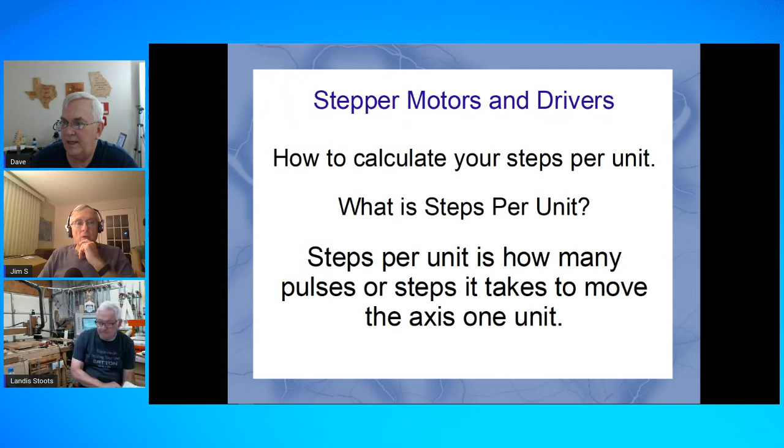Now you might be saying, well, what the heck is a unit? If I can get this thing to change here - there we go. A unit, if you're setting your machine up for inches, one unit's going to be 1 inch. If you're setting it up for metric, it's going to be 1 millimeter. So that's what it means by steps per unit - if inches, how many steps it takes to move 1 inch; if metric, how many steps it takes to move 1 millimeter.

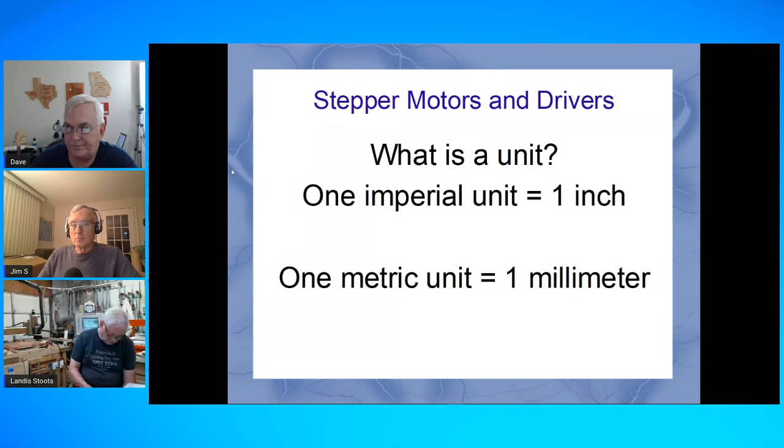Now when you're talking about these stepper motors, and this is a picture I took of this one - pretty much all stepper motors, or most of them, are going to have 200 full steps per revolution. So to go one complete revolution, it'll have 200 what they call full steps. And somewhere on this thing it will probably have a label that says 1.8 degree per step. For example, I highlighted over here on this one - this one said 1.8 DEG/step.

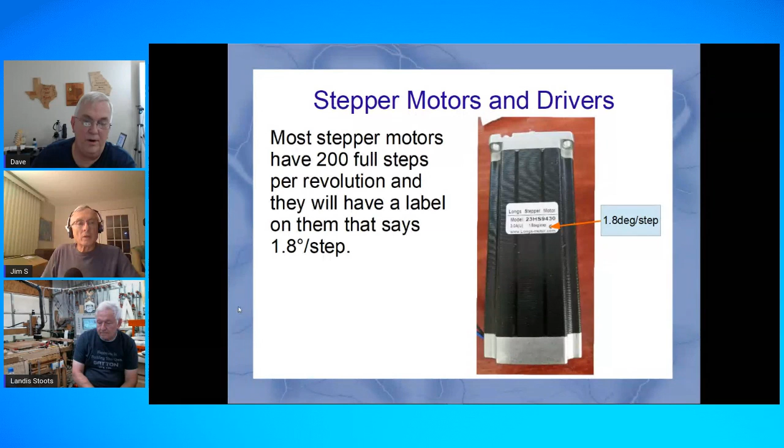So where that 200 number comes from is if you take 360 degrees in a full revolution and divide that by 1.8 degrees, that's 200 steps. So that's where that number comes from.

Now when we're talking about a Gatton CNC or a GarageWorks CNC, assuming you've used the lead screws that I highly recommend, they are an Acme Precision lead screw. I always have links to McMaster Carr on my website so people can make sure they get the right thing. But they will say that they're half by 10, meaning ½ inch diameter, by 10 TPI. In this case, TPI means threads per inch, how many threads are on 1 inch of that thing.

And then it will also say 5 start, and it may in some places say 2 TPI. Well in this case, that TPI doesn't mean threads per inch, it means turns per inch.

So a 5-start lead screw - let me just do this real quick. This is the 5-start lead screw. I tried to take a Sharpie and put a little dot where the 5 threads are, so when you cut this and look at the end of it, you'll see 5 individual threads. So that's what a 5-start is. Also you'll notice the threads are angled at a much steeper angle than say if you got some normal thread, it has a much steeper angle to it.

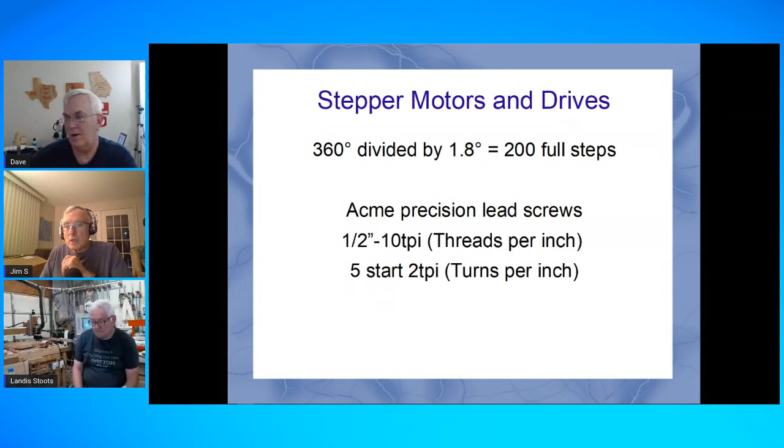All right, let's see what else we got here. So this is what the driver looks like, and you'll notice that it has a pulse rev table right here. It starts out at 400, 800, 1600, 3200, 6400, 12,800, and 25,600. And of course, if you want to use the 1,000, 2,000 and all that, some drivers will use that.

So here, this is how you figure out how to set your dip switches correctly. You have to kind of do a little formula with the stuff, a little calculating, to know where you're at and what you need to set this at. If you want to set it at 6400, which is what I have on the website listed, it says switch 5 needs to be off, switch 6 is on, 7 is off, and 8 is on. So it's off, on, off, on for those dip switches, 5 through 8.

So that's what you would want to set it for. And here I've kind of laid this out where I've done the calculations for each one so people can see how you arrive at this. Notice in red is the one I have, because that's the 6400 steps per unit you'll be setting the dip switches for. That is if you want to set it for 16 steps, meaning between each full step there's now a total of 16 steps from one step to the next, versus trying to run it full step, which you never want to do because it's going to run really rough. But you could do half step, quarter step, 1/8 step, all the way up. You can even go higher than that, and you'd have a much finer resolution down here.

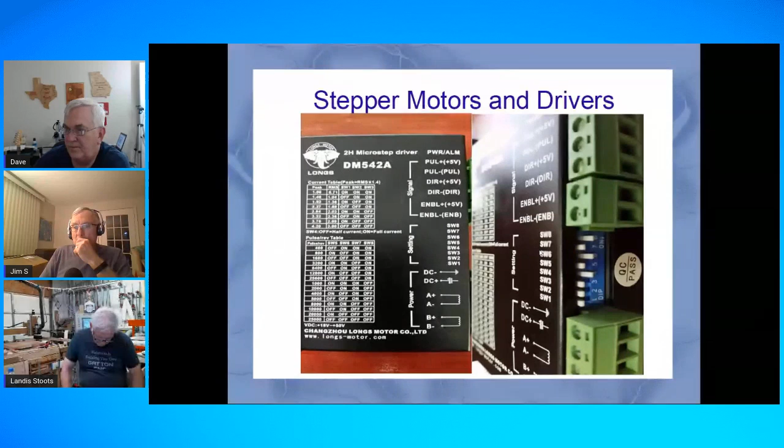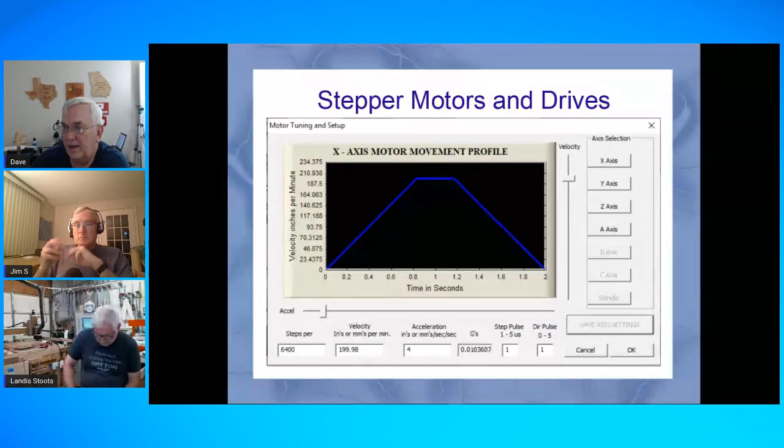And that is the magic number that you put right here in your steps per unit. In your Mach 3, same thing in UC CNC, and I'm assuming the same thing in Linux. I don't have Linux software, so I'm not super familiar, but I'm sure you have to tell it that somewhere. So that's how you arrive at, here we go, at that 6400.

Yes, it's 5 star. I see Matt said 5 star or 5 star. Yeah, it's 5, it means 5 start with the T on the end.

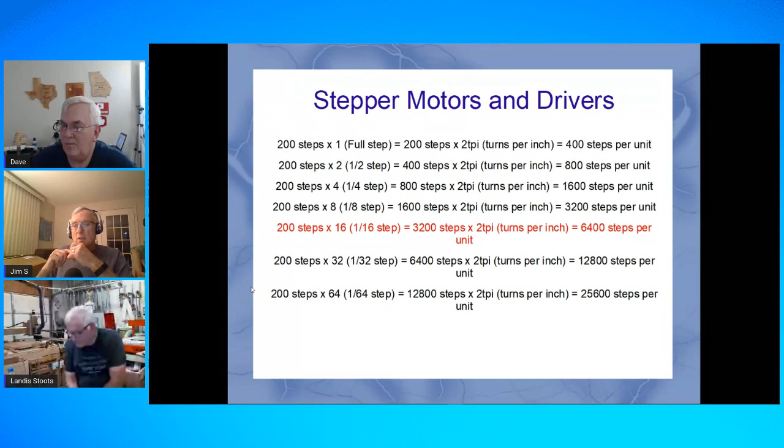Okay, so that is where all those numbers come from. And like I said, I hadn't really explained that before because I always recommended the plug and play kit. And usually the people that wanted to build their own electronics knew all that stuff anyway, they knew how to figure that. So I just wanted to do a little refresher, I guess, or maybe not even a refresher because I don't think we've really talked about that much. But that's how you do it.

And I guess I should go back and look at this real quick. The way this works, again, you take the 200 steps from the stepper motor. If it's a 1.8 degree for 16, you take a 16 step, you take it times 16, it gives you 3200 steps, and then you multiply it by 2 because the lead screws have 2 turns per inch, and that's how you get to 6400.

And as you can see, when you start out here, they just all kind of double as you go. You just keep getting finer and finer resolution. But 6400, or even 3200 if you want to set it for that, would work fine with the Gatton or the GarageWorks, either one. I just always use 6400 because that's what those plug and play kits were. So to keep it simple, that's the way I've run mine. And even when I use the kind with the drivers like this, I just set them for 6400 and it's worked out well.

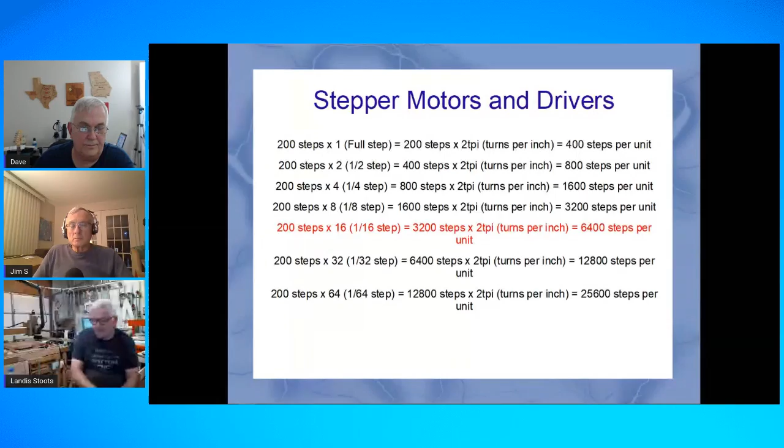So let me take a look back over here in the chat, see if we've got any questions.

Scott Wilson says, the dogs are on, you're killing me. I know, I've got them on my TV in the living room. I just got the sound muted.

Not that I could hear it back here anyway, but all right, Kevin says his is set to 4,000 steps per unit, and he's running a Gecko. Yeah, the Gecko uses all those other numbers, the 1,000, 2,000, 3,000, 4,000, and all that.

Let's see. Wayne Hurl's out there, I'm trying to say, I don't see any questions. So either they don't care or they understand.

That stepper looks like it's a foot long. Yeah, it's not quite a foot long, but it's pretty big. Larry Dugger says he suffered from the great Molex connector burnout this week. Well, all I can say, Larry, is that it's going to get you sooner or later. So if you're using Molex connectors and you think they're working okay, it'll get you sooner or later. I can guarantee you.

Hey Dave, you might want to mention too, when you change those settings in Mach 3, you have to click on save. Yeah, that's another good point.

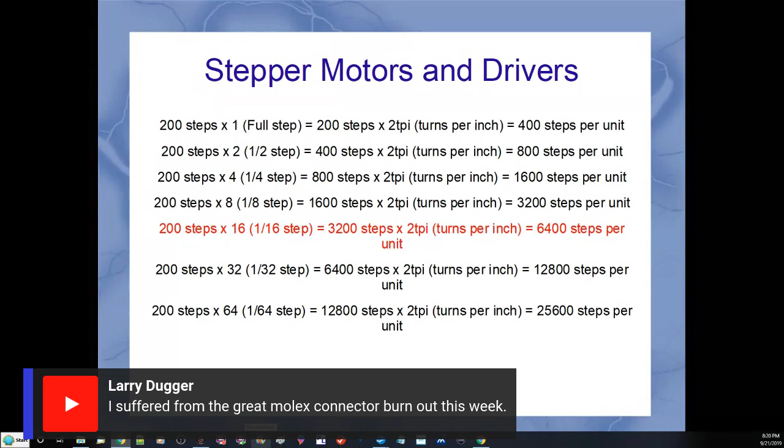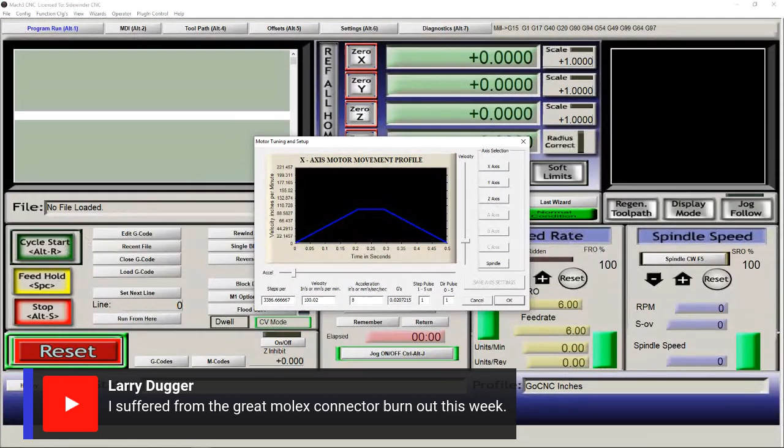In fact, I've got, let me turn that off and come back to, if I can get this. Yeah, I'll just show it here. Yeah, when you get this setting, well this one's going to look all screwy because I've got this one connected to that little machine behind me here. So I had that set up for the show in case anybody needs to see any kind of, well if it's only 20 after 8, I'll probably do a little demonstration for something else of a question I saw on Facebook. But yeah, this for the Gatton and the GarageWorks, this would be 6,400 here.

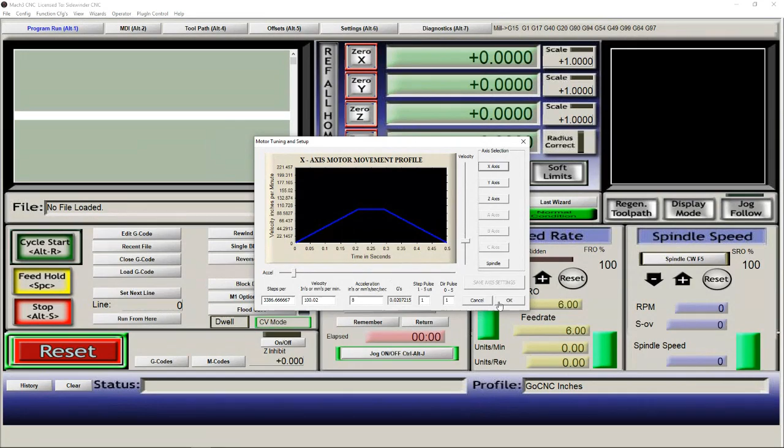And then you need to make sure whatever you put that in, that you have to hit this button here, which is grayed out right now, but it says Save Axis Settings. You have to hit that before you move on to the Y axis. Because if you don't, and you put a number in here and then you just click onto the next one, it automatically reverts back to the default, which I believe in Mach 3 is like 2,000 or something like that. So you won't actually be saving those. And of course, the other good thing to do is to come here and save these settings for your configuration so that you save everything correctly in your XML file.

So, all right, let's see. They make 0.9 degree steppers too. Yeah, well, that's half of 1.8, so sure.

Dave Mitchell from Seattle. Let's see what else we got here. Steve Atkins says, "Go Dogs."

Okay, Greg says, "How does the CNC interface with the PC?" That's a good question. I'll try and explain it here. Okay, it says CNC here. For most of these hobbyist machines, it used to be a serial interface, or a lot of the older ones use the old-fashioned parallel ports, and some people still run that.

But now I have a little device. I'll see if I can hold it up here without unplugging it. I am actually running a UC100. It's this little device which connects to a parallel port, so that's running to the controller on the back of that little machine. But this is nothing more than a USB cable running to the computer, which interfaces with this software, which is the Mach 3 software.

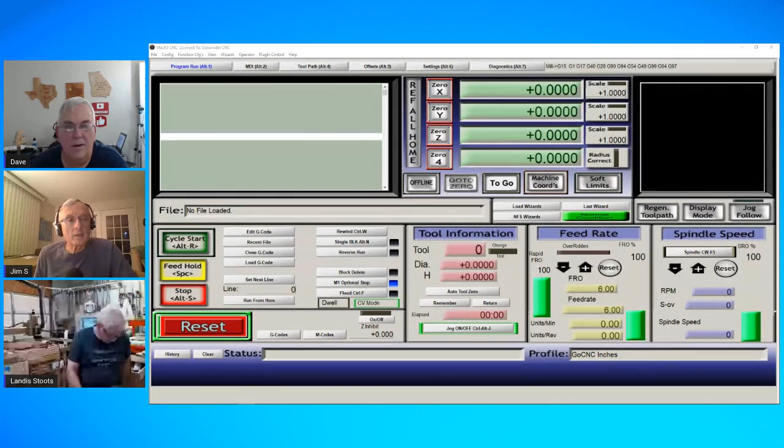All right, let's see. I'm not sure what Dave's trying to say here. The URL should show you a picture of the screen. Dave, do you have to put in a load resistor for the motor controller? No. Like I said, I'm not an electronic guy, but I know enough how to hook up the stuff I use. I built my own electronics, and I did not use a load resistor. It's not needed.

Okay, let's see. He says, look about 3 comments higher. Let's see if I can find where that question was. Well, it may be more than that. Yeah, I don't know what he was trying to say there. Okay. Alrighty.

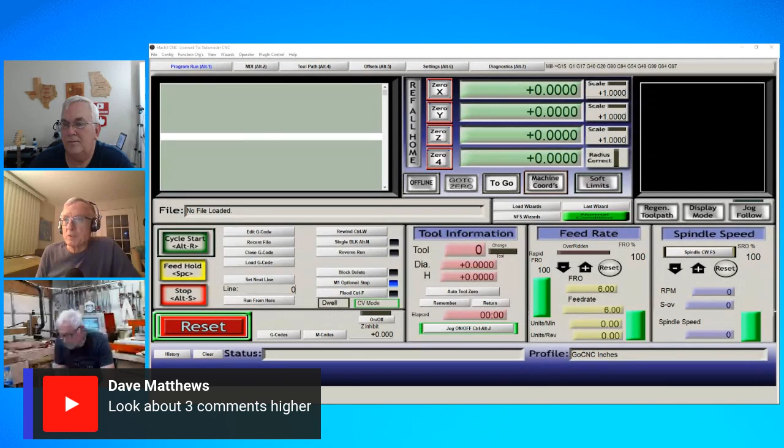That question from Thomas Grim: if it fits with the topic, I'd like to see a demo of the jogging functions, and how do you control the jog step size, and how does it interact with an LHB04 controller?

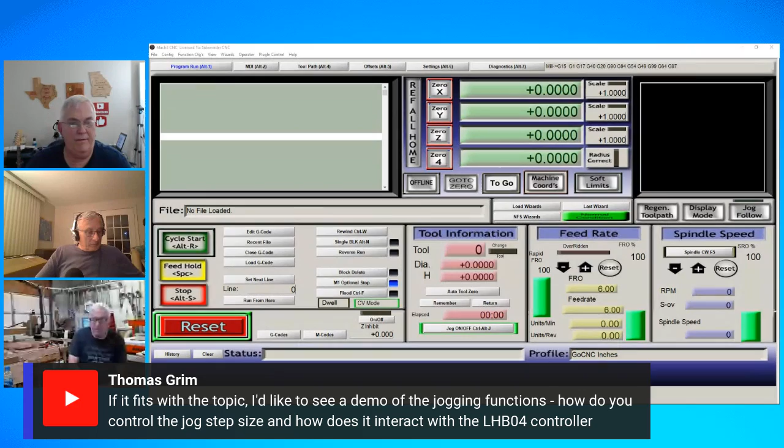Okay. Well, let me turn the screen share off here. Oh, great. Now it's not going to work. All right. Let me see if I can reset that camera. Is it there now? Nope, it's still not popping up. Well, I may try to do that, Thomas Grim, if I can get this to. It's up, Dave. Oh, it was up for a second. There you are. Okay, I got this.

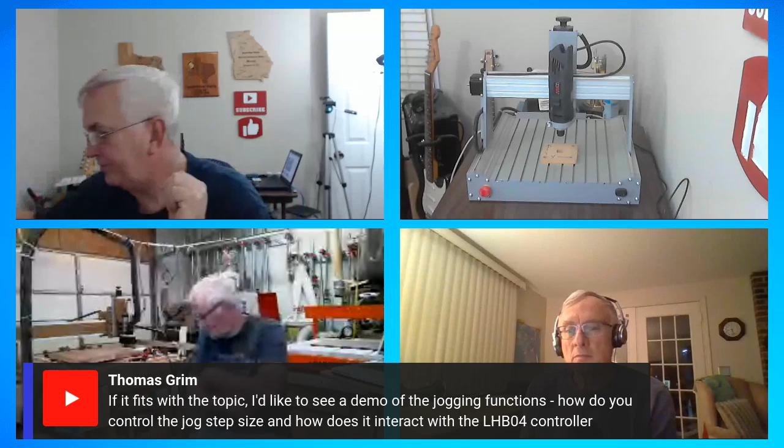Okay, so he wants to see a demo of jogging functions, how I control the jog step size, and how it interacts with an LHB04. The LHB04 controller, that's the pendant, I believe. Well, I don't have a pendant connected to this one, simply because in order to control all this by the same computer I'm using to do the live stream, I'm totally out of USB ports, because I've got all kinds of stuff hooked up to do this live stream.

And when I screen share to do the software, it's going to make that picture little, so you'll just have to bear with it. I'm hoping they will add some more options for the screen sizing. I'd love to put this screen here, take up half, and then camera 2 take up the other half. But right now I just have to do this.

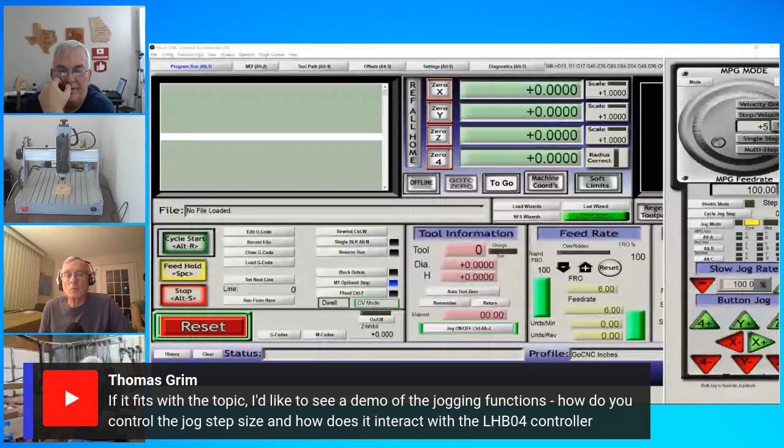But using Mach 3, I'm going to have to show you like this because I don't have a pendant connected. If I hit that tab key, it will pop out this little virtual pendant. You can step the jog, set the jog rate. Right now it's set at 100%. What was the question again? A demo of the jogging function. I think he wants me to show it with that LHB04 controller, and I'm not able to do that because I don't have one.

But just using this, I use the arrow keys on the keyboard, or I can actually click on these as well. And this may get a little bit loud here.

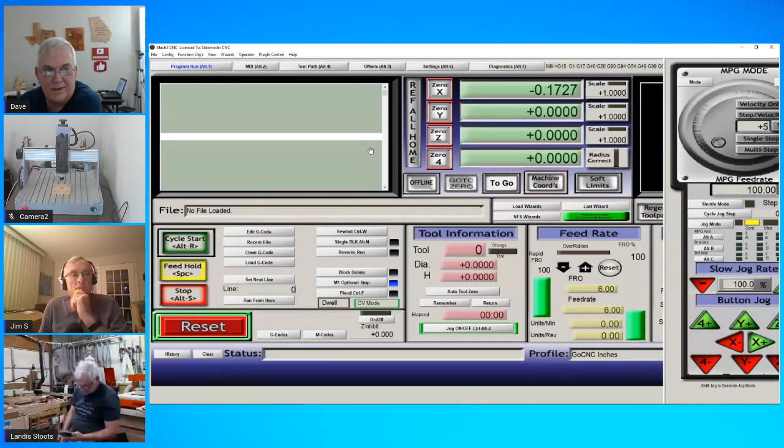And I don't really think this is going to answer his question. But the pendant controller you're talking about is basically sort of like this. It has a step function, and depending on how many times you press it, you can have it move 1 inch every time you turn a click of that wheel. You can have it move 100 thousandths, or 0.100, every time you turn it a click. You can have it do 10 thousandths, or you can have it do even 1 thousandth.

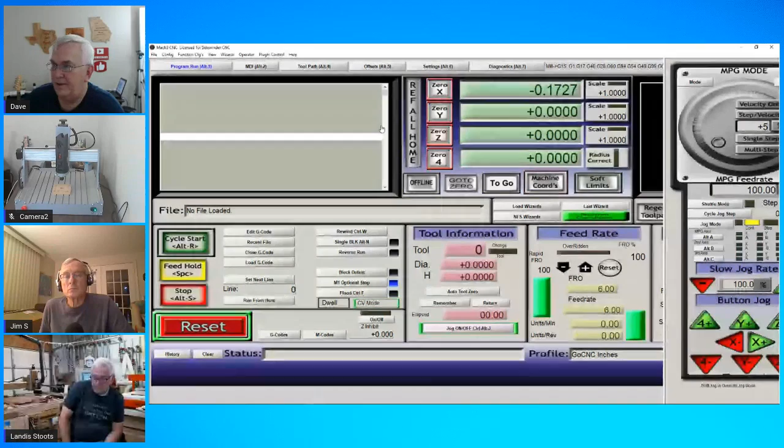So if you're trying to dial it in and set it up, and you want it to barely move, you can set it on that thousandths and turn it that way. I'll probably have to do the demonstration that you're wanting to see when I'm out there in the shop where I have that pendant hooked up, because I just don't have it in here at this time.

Let's see. Let's see any other questions. Okay, Jerry Brown looks like he's got a question here. Well, let me take this question first.

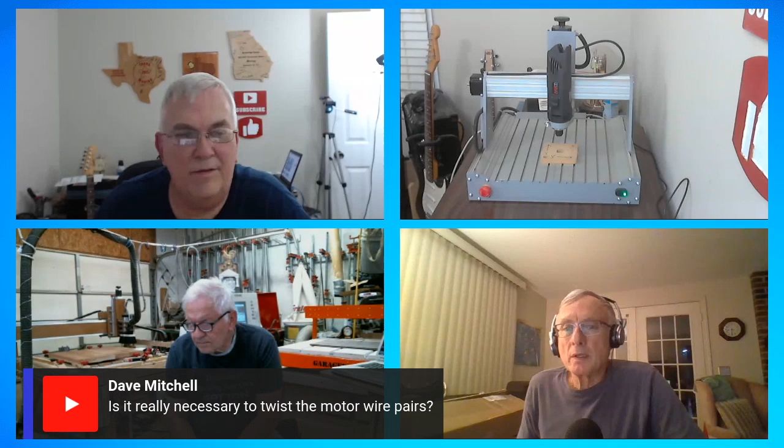Is it really necessary to twist the motor wire pairs? I'm not sure what that was referring to, but as we've talked about before, for 4 wires, they're in pairs, so you've got to keep the pairs together. If I remember correctly, green and black is one pair, which will be either the A or the B, and then the red and blue will be the other pair.

And as we've shown before, to determine that, you should be able to take this motor, grab it by the shaft, and without a whole lot of effort spin it pretty easy. But if you take wires that are paired, like I'm going to hold these black and green together, now I can't turn that. So that's how you determine which 2 wires are your pairs. I don't know if that answered your question, Dave, but I hope it did.

Jerry Brown says, I have the original Xylotex box and Bob breakout board, but I am building a second Gatton. Is there a new breakout board that works with the new controller? Well, what new controller are you talking about? Another Xylotex? Because at this time, he's not even selling those anymore. I don't know what got into Jeff at Xylotex, but apparently he's getting into selling CNCs now. He's got a couple of different little CNCs that he's selling. So he didn't have any kind of kit or anything.

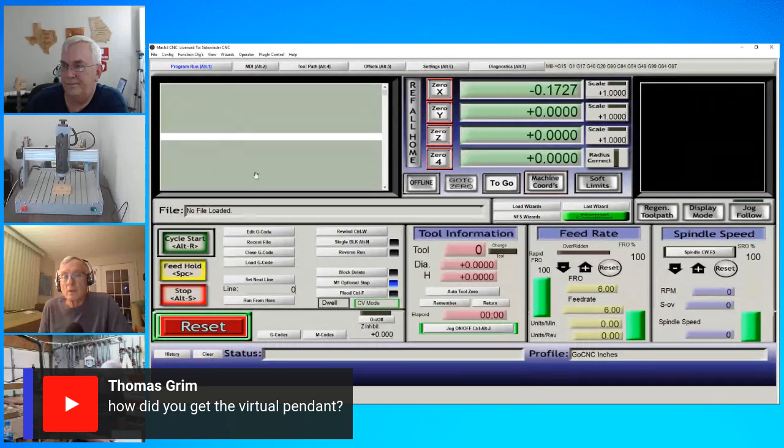And I think mine's kind of screwed up because I'm using dual screens here. If I remember right, I think it pops out on the other side when I'm using my computer out in the shop. But that's all you're doing is you push the tab key to make it pop out and the tab key to make it go back in. All right, let's see. What else we got over here? Yeah, Lyle says hit the tab key for the virtual pendant. That's it.

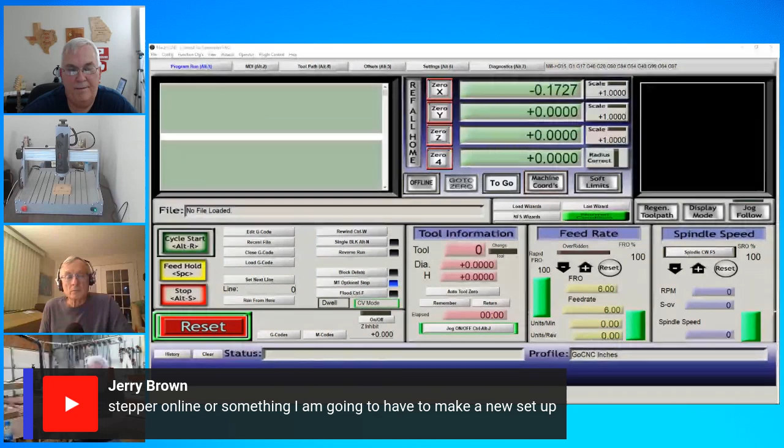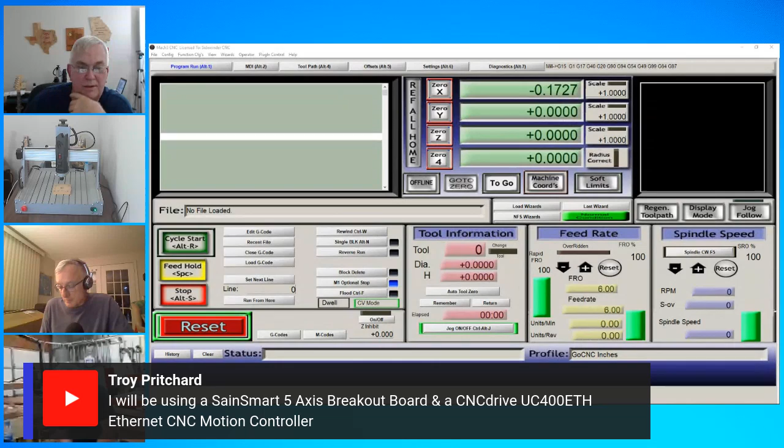Troy says he'll be using a SainSmart 5-axis. That's a good one, that one he's mentioning there. And all of them aren't very much on Amazon.

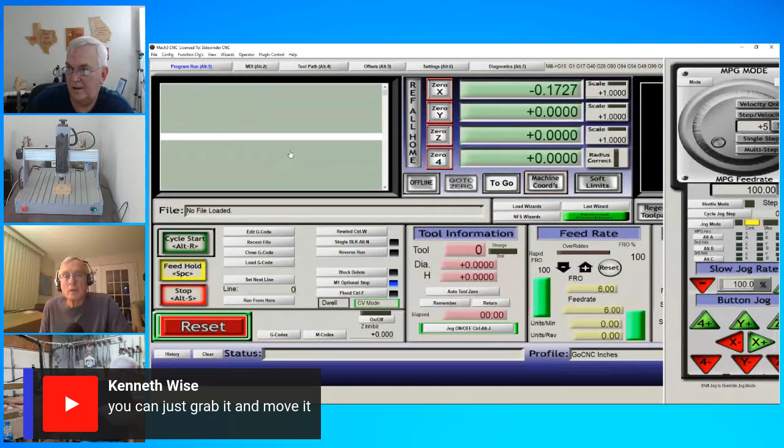Kenneth Wise says you can grab it and move it. I guess he's talking about that virtual pendant. Let's see if you can. I don't know that I've ever even tried that. No. Not letting me do it, but I don't know if it's got something to do with because I'm on this dual screen monitor or what. But yeah, I've never known you could move it. I never have done it.

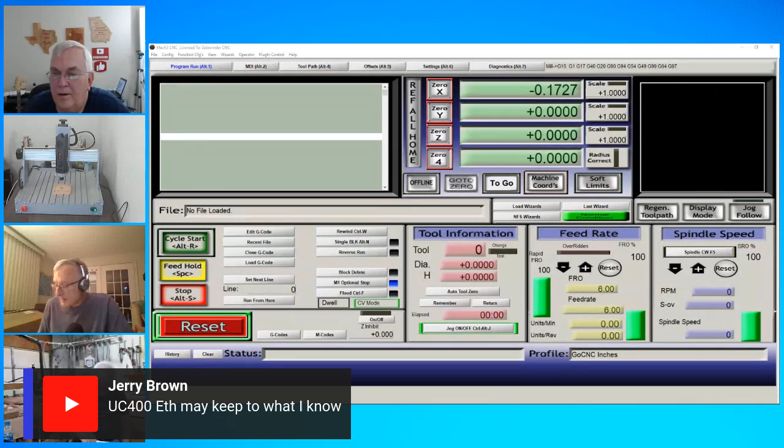Jerry says he may use the UC400 ETH. Okay, Jerry, I'm glad you're watching tonight because actually you're one of the reasons I set up this. Yeah, so you got one from Chips that kept overheating. If you just keep a good fan blowing on it, you'd probably be all right, unless it's got so bad that the driver's totally shot.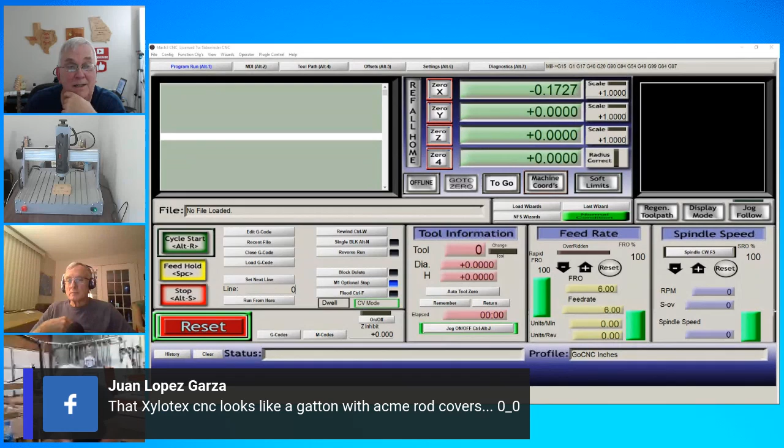Xylotex CNC looks like a Gatton with Acme rod covers. Yeah, I did notice some similarities when I checked that out.

Anyway, let me tell you about Jerry Brown. He had posted a question, wanting to know, he's running something, and like a lot of us, let me get this Mach 3 out of here. Like a lot of us, he's positioning the start point of his router, kind of like what you see in camera 2 there. It's kind of over the center of the part, which is the way I like to do a lot of things. I program them to go to the center.

But I guess he's kind of in production mode, and when he's running a part and it goes back to the start position, it's right in the center of the part, and you've still got the spindle spinning around, so you have to wait till the spindle slows down to move the part. Either that or you have to jog it back out of the way, and that gets to be where it's slowing you down.

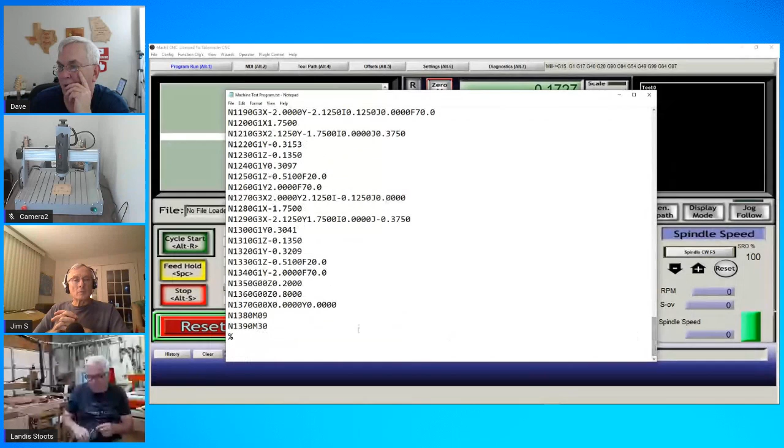So I was telling Jerry that if you come in here, and I'm going to load that part, you can see here, this is the same test part that I have laying on that table over there. But if you just edit that program and come all the way down here to the bottom, this line right here, if you just want to move it back, for example, that part's not very big, so I could change this to like 5 and then save this.

And then when I got done to the end of the program, I don't want to run this whole thing because it's kind of loud, but we'll see if I can run it from here.

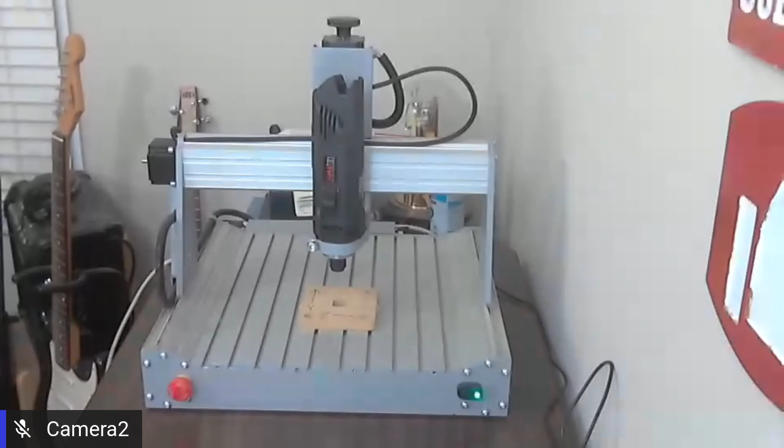Okay, now if you look at that, well, it's kind of hard to tell from that, but now it's not in the center, it's actually moved back. You can tell it better, really, I guess, from looking at this right here. You can see that instead of coming here and stopping, it moved out here with that 5 inches.

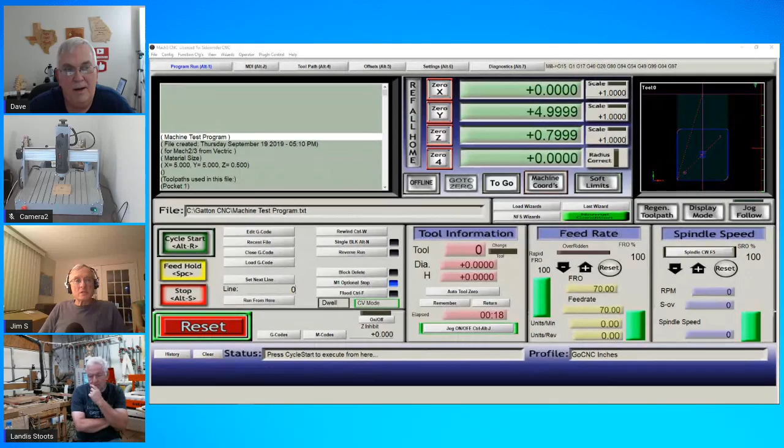But what I would do, Jerry, is if you've got room, of course, I know you got room on that Gatton unless you're making really big parts, is make a fixture that has at least 2 parts, either side by side or front to back. Side by side, if you're going to use 2, it'd be the best.

And then there's another little trick you can do with this. And let me come here, and I'm going to load this one in. I'm going to bring it back to 0 here. And now I've got 2 parts side by side. So if I want to get in a production mode, I can come and edit this program.

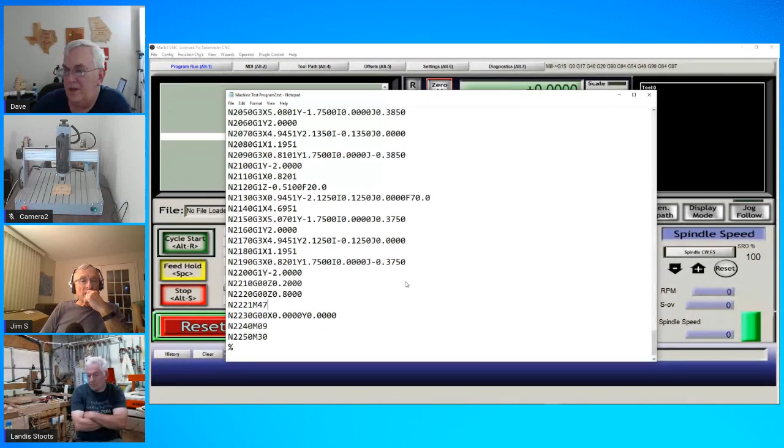And I can come all the way down here, and then right in front of where, and I'll just put, let's see, that's 220. I'll go, oops. Here we go. You can put an M47. And an M47, if you check, let me save that and put it back in there. If you come over here to where your M codes are, your M47 says that it's repeat program from first line.

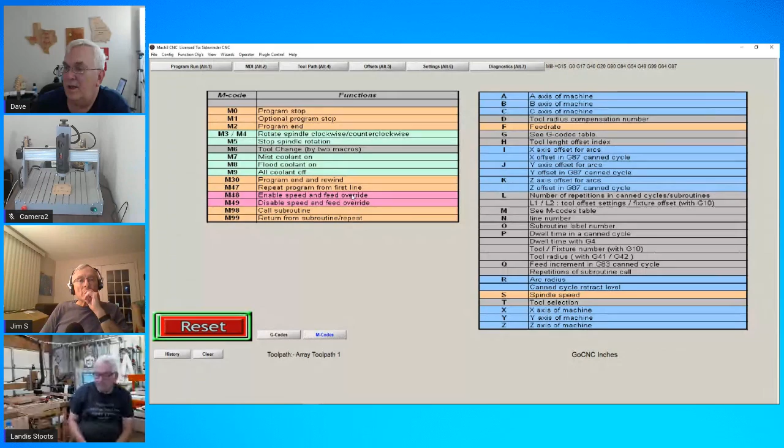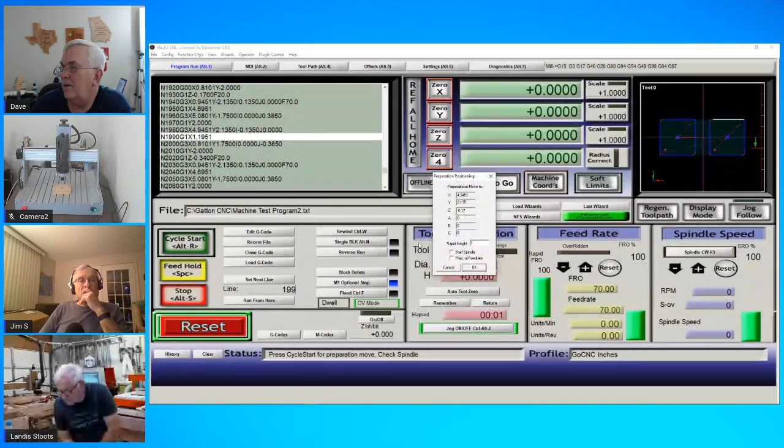So if you're in a production mode and you've got a fixture set up with 2 of these, and say you've got 100 of them to run, this makes it really easy because, let's see if I can come. Well, I'm going to come to the second one. Yeah, somewhere in there. And what will happen is it'll finish the first one, the one on the left. Then when it goes to the one on the right, you can pull the blank out on the left, plug another one in your fixture, clamp it, or maybe you've just got a pocket where it fits snug or whatever. And then when it finishes the one on the right,

I should have went a little bit farther before I started. Okay, here we go. So when it comes up to that M47, it jumps to the beginning of the program, so it forgets where it's going to 0, 0. And now it'll just take off and go back and start doing the one on the left again.

So if you got a whole bunch of these to do, it will sit there and run all day long like that, as long as you've got that M47 in there. The bad thing is it'll run all day long until you tell it to stop. So you have to be there. But you know, if it's a quick run and you're just trying to knock them out in a hurry, that's a good way. You can put the M47 on there and just keep feeding blanks.

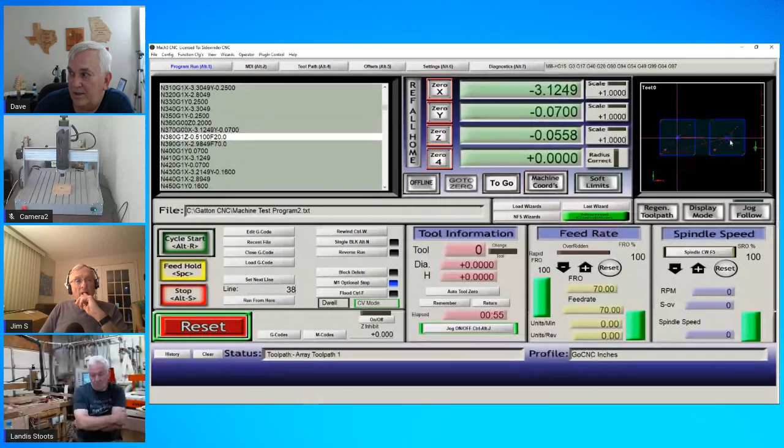Like, say each one of these takes 10 minutes and you've got 4 of them there. You can start the run, and while it's running, you got about 40 minutes before it's going to get back to that first one again. You can go eat a sandwich, or you can go be doing some sanding, or whatever else in your shop, and just make sure that when it gets down to this last one, come over and start swapping these out. Or if you want, as soon as this one gets done cutting and it moves out here, replace that one. A lot of different ways.

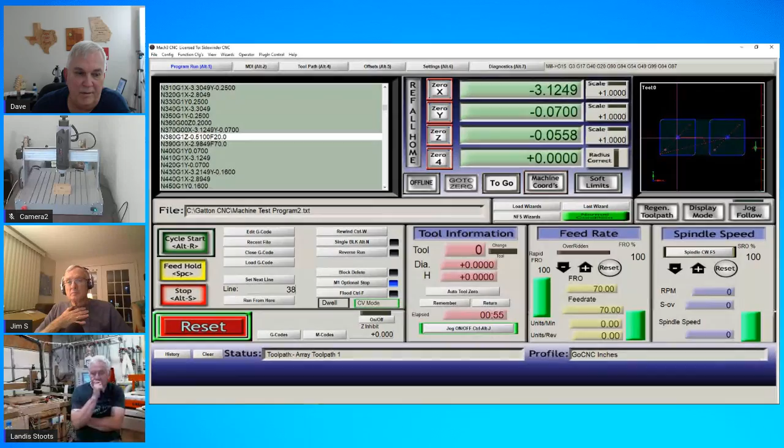The main thing is, the way to run stuff quick is to just make sure the machine never stops or has as few stops as possible. So that M47 works great. I've used that a lot of times on stuff where I got to do a bunch of them and need to get it done in a hurry.

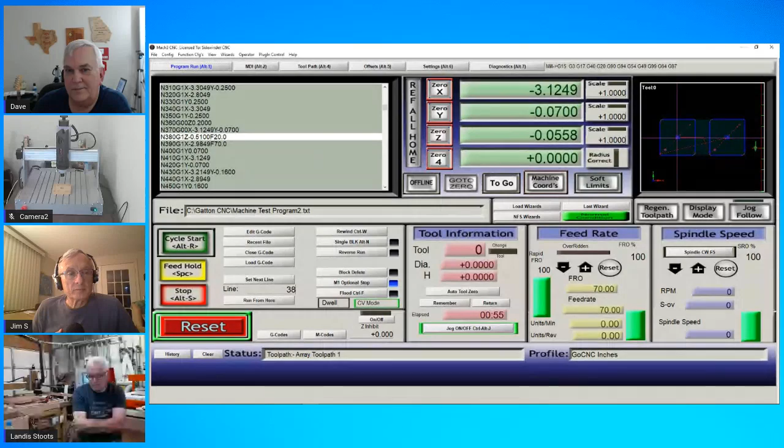Bucket says, yeah, M47 works great. He cuts his dog bowl tops and never stops. Thanks for the info. Yeah, I mean, it's all right here. None of this stuff I'm coming up with is anything I invented. It's all right here, either here or in the manual and stuff like that. So just gotta take a minute and find it.

All right. And by the way, was that machine too loud? I muted a couple of times there. Was it too loud while I was trying to run?

Let's see. Jerry Brown says, when I do production, keeping it running will save a lot of time. I found an issue with my fixture and need to design the cam holders for a jig, and I'll make a 4 square to test this. Yeah, just remember that M47, Jerry, because I know you do stuff where you're using blanks all the same size and making a bunch of stuff. That'd be a good thing for the kind of stuff you make.

Let's see here. Ray Dixon says, last week had a power failure while running my GarageWorx. Everything shut down but my laptop, so I knew where I needed to start from, but the Mach 3 locked up also. Yeah. Are you running any kind of a motion controller like a UC 100 or 300 or 400 or anything like that? Or are you running a parallel port?

Okay, Jerry says it wasn't loud at all. Good. Jerry says not that bad noise. Okay, well, I muted just in case it got too loud.

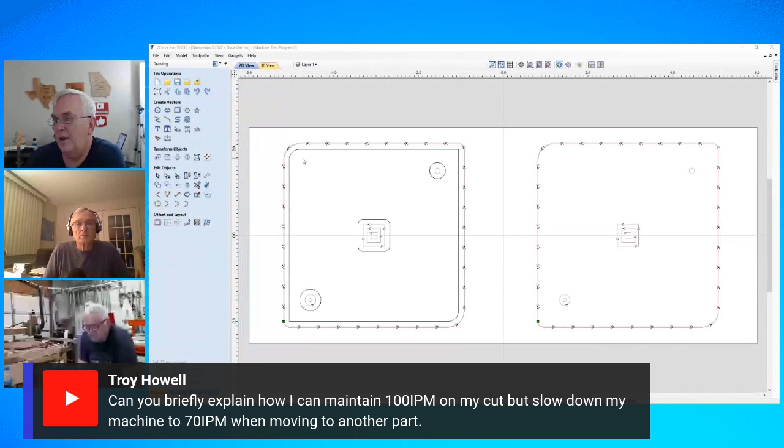Okay, let's see here. Here is a VCarve program. It's a simple program, that little test part. I've got two parts, or actually, I've just got one part. And in this example, I was using the array tool. So let me just delete that.

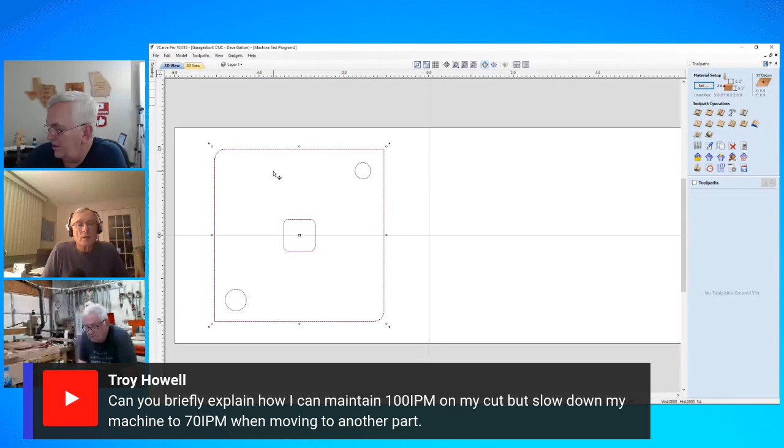And I'm not going to do the whole thing, I'm just going to do a profile path here. But first, let me copy this and scoot another part over here. Okay, so now I've got two parts. Now they could be the same part, they could be different parts, it doesn't matter.

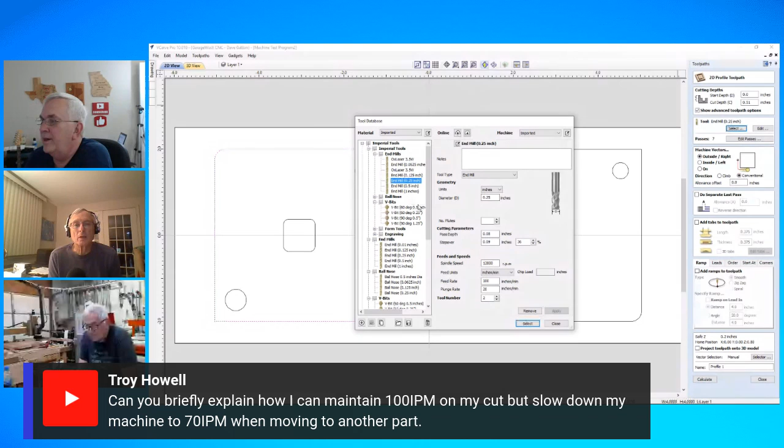Okay, so what I'm going to do is I'm going to put a profile tool path on this part. I'm going to select my 1/4 inch end mill there. And I'm going to say, wow, this is all different, I haven't even done any of this since I got to version 10. So, all right, we're going to just calculate that. Okay, so there's that tool path.

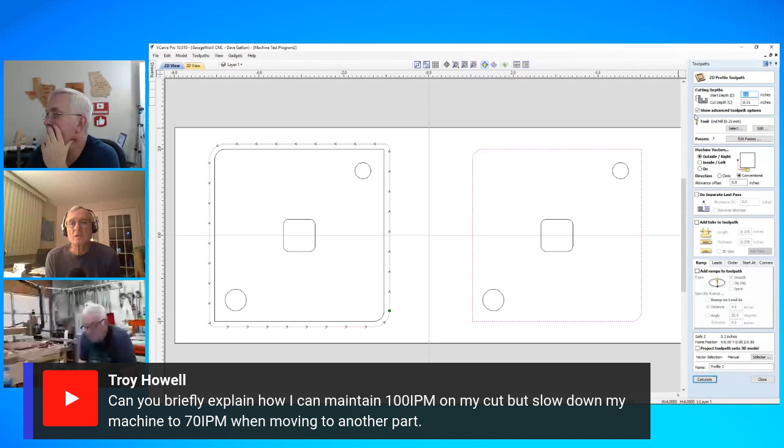Okay, now I can come over here to this one, and notice if I hold my mouse over where the tool path is, it says profile, and when you hold it, that little window pops up and says the feed rate on that one is 100 inches a minute. Okay, well now I can come over here and do this one, a separate profile. I'm going to select that same tool, and again you look right here, it's 100 inches a minute, right? Okay, so I'm going to calculate that.

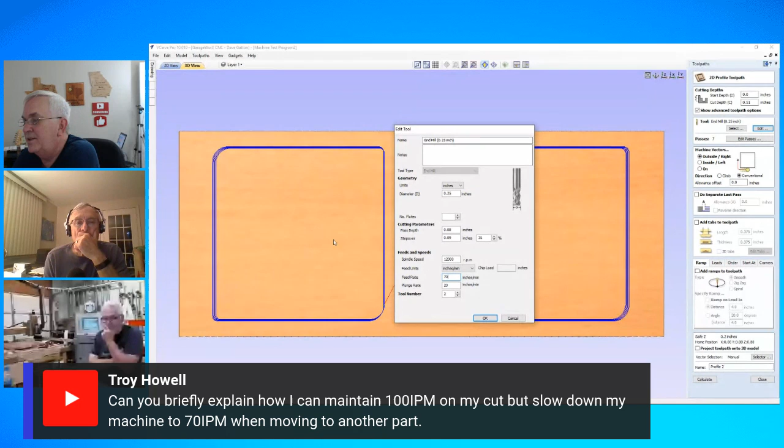And now if I hold up my mouse here, it is 100 inches a minute, the same as that first one. But if I want to cut the first one at 100 inches a minute and the second one at 70 inches a minute, I can come over here to where that second profile is, and I can double click it to get it to come back up, then go to edit, and I can change this to 70 inches a minute and click OK, and now hit calculate.

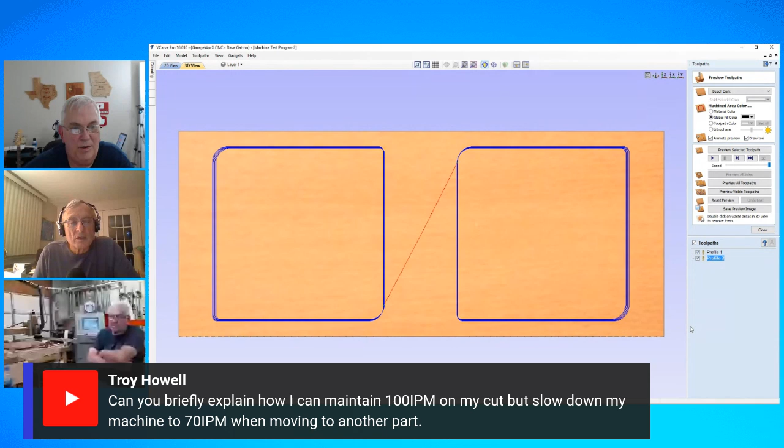And now when I hold the mouse over the first one, it's still at 100, but when I do the second one, that one says the feed rate is 70. And so even though I'm using the same tool, you can use that little edit feature. You select the same tool, but you come back and edit the second one and make that one whatever you want.

So we've got the same parts, two different tool paths. One of them's cutting 100 inches a minute, and one of them's cutting 70 inches a minute.

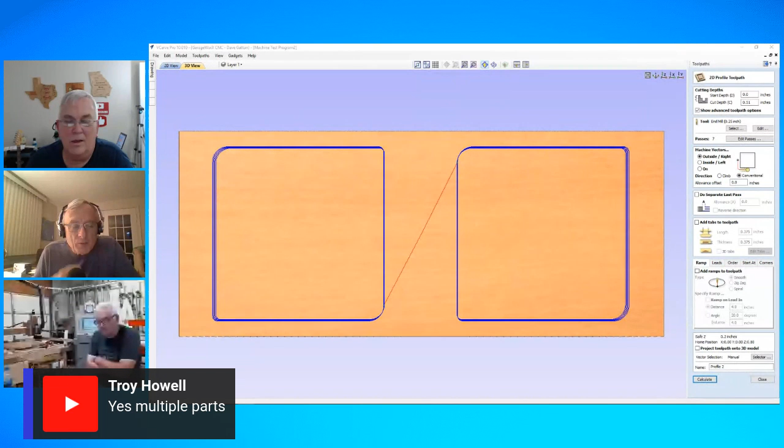Hey Dave, I read that as he wants to cut at 100 inches a minute, but move to the next part at 70 inches. If that's how you read it, he wants to slow down the rapids, so he has to set his rapid rate to be 70 inches for his rapid moves.

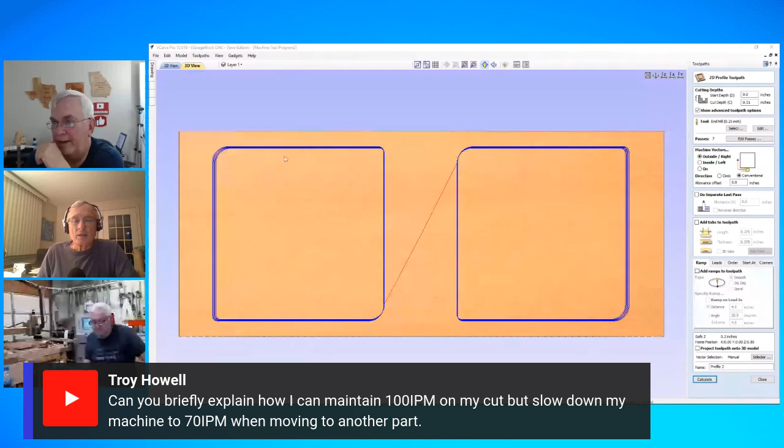Oh okay, well that's easy enough too. Let's see if I've still got it open. I hope I do. Yep, I do.

So if you want your rapids to go at 70, you don't want them to go any faster than that. You could come here to this config, the motor tuning, and change it like this. For example, that little machine out there has the velocity set at 100 inches a minute. You would just change that to 70. Right now you probably have it set at like 200 or something, so you change that to 70, and that way the machine, when it's jogging, will never move faster than 70 - if you set it for your X and your Y, it'll never go faster than that.

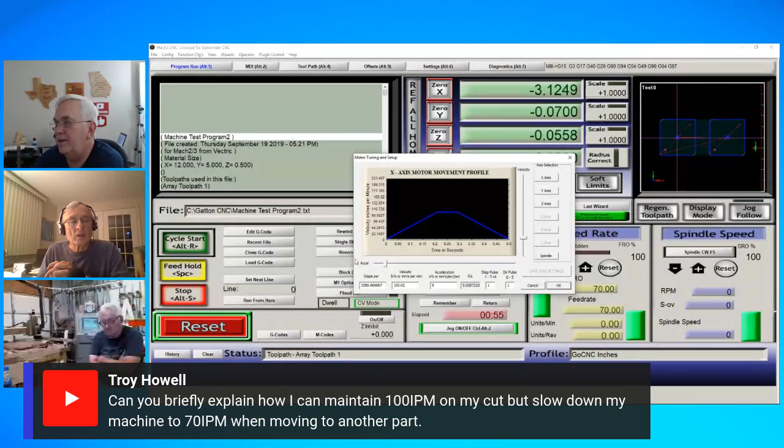Now there's other ways of doing it too, and again this kind of gets into knowing a little bit about G code, because if you come here and edit this code...

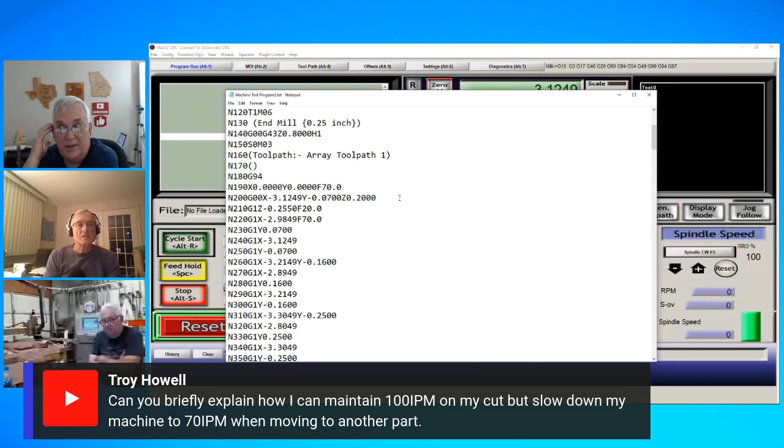Every time there's a G00, that's a rapid move, so it's going to go at whatever the max is - whatever you have set up in your velocity on your machine. For example, there's an F70 code here, but when it gets down to here, it's probably going to move at whatever the max is - well, of course, if it's a short distance, it's not going to get up to that speed anyway.

But you could go through and actually put a command in here with an F, which is the feed rate, and set it for 70 so that it wouldn't move at whatever the max is. But I don't know - that involves knowing a little bit about the G code and how to go in there and change that.

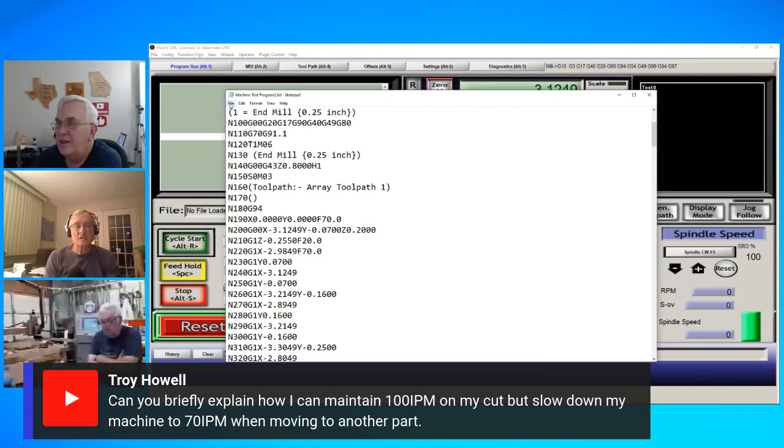I always tell people, these days, because of software packages like VCarve Pro and pretty much any of them, you really don't have to know anything about G code, and you can run a machine fine because the software does all the stuff. But it is really helpful if you take the time to learn a little bit about what these codes mean, because sometimes it's just like that, putting that M47 in there a while ago - it's a lot easier if you know how to manipulate the G code and put blocks in there that will do something the software won't do.

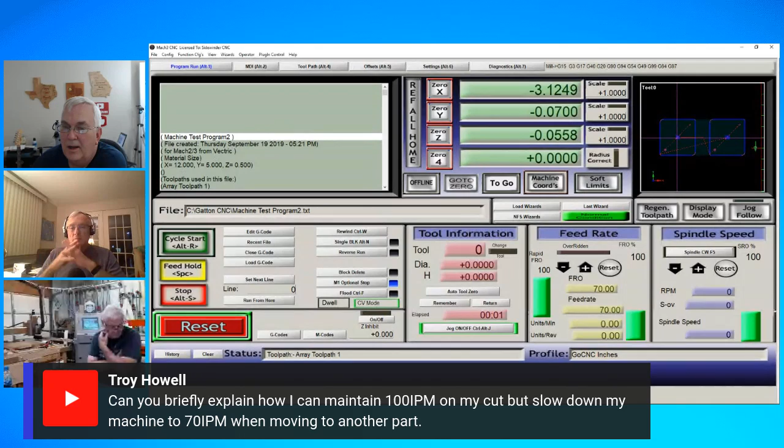So I don't know, let's see what he says here. Basically, the red line is where I need to slow it down. So yeah, I guess when he says red line, he's talking about the rapid move. Okay, here he says that's the ticket, that's what I was looking for.

So yeah, don't be afraid to get in here and play around with this G code, because it's really - you've all heard me say this a million times - it's not rocket science, it's really pretty simple when you think about it. Any kind of G1 code means move while cutting - you just think of it that way, it means it's going to be moving while it's cutting.

A G00 means it's moving without cutting, so it's a rapid move, moving from hole to hole or from part to part or whatever.

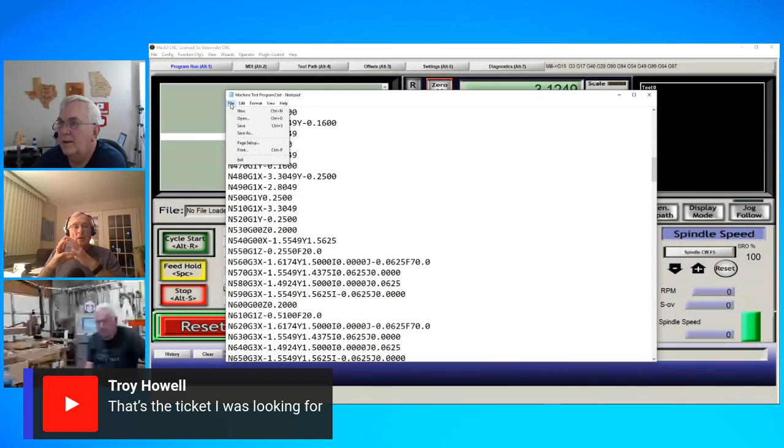Really, I mean, when you're running a program, I know that thing is scrolling so fast you can't really keep up and try to understand it. But you can also do this - let's see if I can remember where it's at here.

Where is it? It's probably right in front of me. But there's a way to run this one block at a time. Oh, here we go, I knew it was right in front of me.

You can select that, and when you turn this on, you notice how... well, let me turn that off and get it to... now I'll turn it on. See, now it stops. So I can go, okay, let's see what this line does. Well, let me get on down here a little bit farther.

So you can do this one line at a time. You can see, okay, that one says 00 F70. So that's what it did, it moved back to the 0.

Okay, if I say what's the next line do, I can see it move back to where it's getting ready to start. And it still should be 200 thousandths above the material. The next line, what is it doing? It's the Z dropping down. So now it's in the material and it's doing a plunge at a feed rate of 20. On and on and on.

So you can set that single block and run through a program, even if you don't know a thing about G code, and that will help you start to see what things do, where it moves, and how that works.

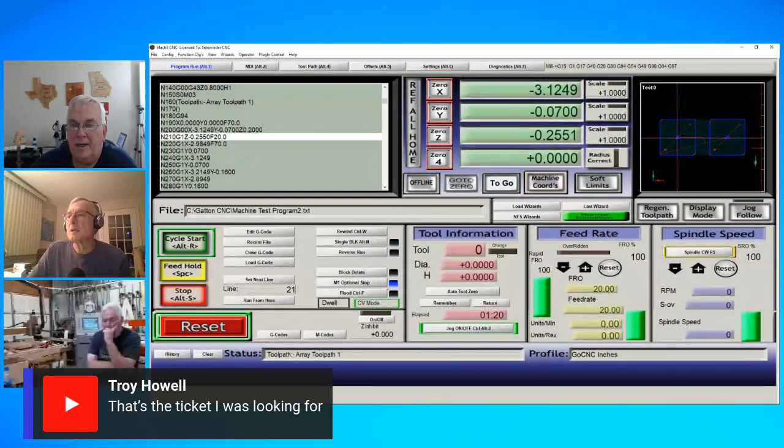Obviously, if you've got your 0 point in the center like this, anytime it moves over here it's going to be negative, if it moves over here it's going to be positive. So don't be scared to get in there and look at that G code, and even fool around a little bit with things. You're not going to hurt anything.

All right, well we were ready to sign out of here 20 minutes ago. It never fails, every time I say I'm going to go home, shut off the lights and go home, everybody starts asking questions. So, all right.